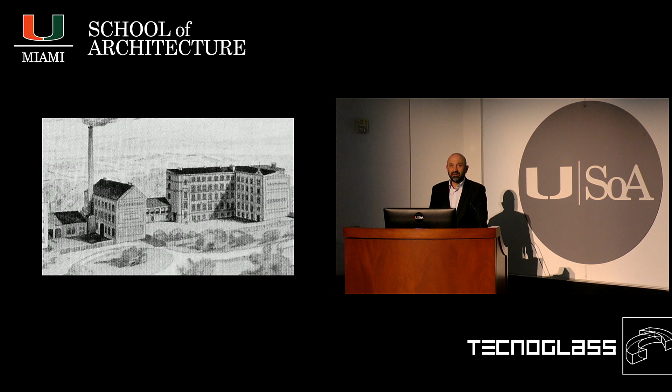And it's a company based in Berlin, or was based in Berlin, went bankrupt in '86, who was at the forefront of font and type development worldwide. The company was called Berthold, and this is their company building. And they produced lead stamps already at the end of the 19th century to create this kind of mesh of numbers and letters to create confusion.

And these patterns are now mostly found on the inside of envelopes, and this is because once you get a letter that has personal information and you hold it against the light, this pattern camouflages the private information. Similarly here on these multiple forms, when you get a printout or your personal PIN number, it's produced by printing through the pattern onto a second layer, but the pattern on the front page camouflages the print inside that envelope.

And my research was not super successful, but the information I found was that around maybe the end of the 19th century, with the advent of carbon paper, and those of you who still know typewriters, you could write the original and copies at the same time by having a carbon paper that traces your writing onto the next page through the pressure of this carbon powder onto the other. I even feel like I have to explain now how carbon paper works.

So it's an efficiency tool in administration. You could write the invoice and the shipping slip and all of this at the same time. And in areas where you don't want the information to show up, it had a pre-printed camouflage pattern. So if you type in the value of the product that's shipped, you wouldn't be able to read it because it's just part of that confusion of numbers and letters.

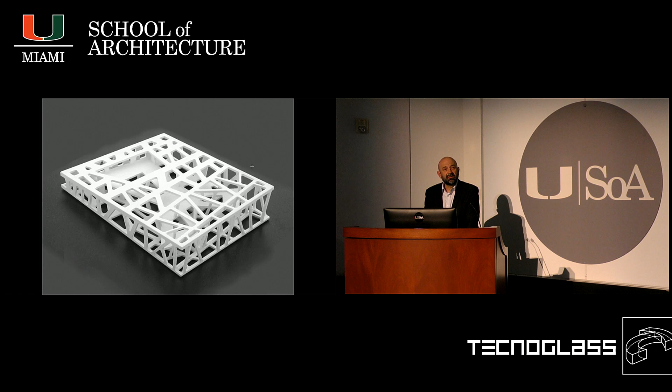On a larger level, this skeletal space that you saw before was already explored in a dining hall near Karlsruhe, in the southern part of Germany. It's a building that used for the first time our timber construction process that we also used in the Metropol Parasol that Rudolf mentioned earlier, that has a polyurethane coating and therefore creates a certain sculptural quality, because we could erase a lot of details that are usually expected when you do a building. There's no metal flashing, there's no other material.

Once the rain hits it, the vertical, the floor, the ceiling, they all are, again, like kind of an envelope, in this case more of a skeletal envelope that looks the same, but of course every surface has a different property. So the polyurethane on the wall might be a different one than on the floor, because the pressure, the diffusion, even the acoustic qualities have to be different.

But in a way, it shows quite well what we try to achieve, which is a sculptural space that shifts back and forth; it's difficult to grasp the scale of it because a lot of architectural elements like stairs or doors are more part of an overall sculptural gesture rather than a tectonic argument. So these are some images here. You see again the green on the floor, on the walls, on the ceiling. They all have different properties, but in a way it's the same skin or envelope of color that creates that space.

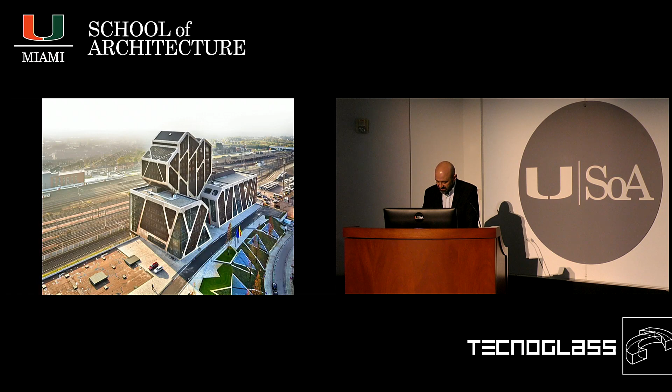A lot of projects happen, of course, on conversion areas here as well as in Europe. One famous one is Hudson Yards in New York. This one here is along the train tracks in the former cargo area in Hasselt, Belgium. You see the train station here. It has a master plan by West8 for the whole ring of the beautiful medieval downtown of Hasselt. And this here is the former cargo area of Hasselt.

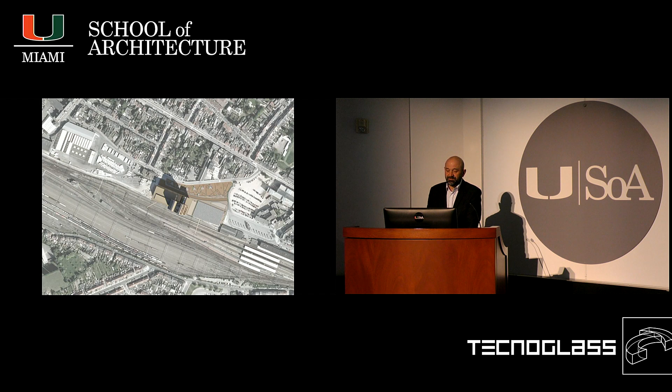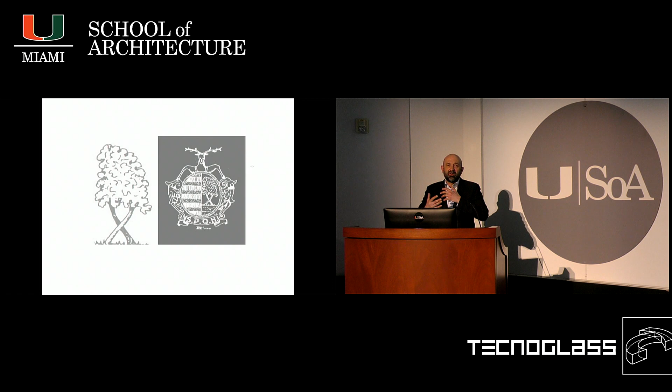Hasselt comes from hazelnut trees, which is kind of a beautiful icon and name for a city. But also the logo already shows that Hasselt means 2 hazelnut trees, and that's the beginning of a community. You have these 2 trees that already embrace each other. They kind of dance around each other. They start to communicate. And that was a beautiful, let's say, starting point to look at the city again.

And what we found was that from each important period of the city, there were always 2 high points in the skyline. So the 2 medieval church towers and the 2 towers from the 60s, which was a technical town hall. And then West8 also proposed 2 towers on the new development. I'm not sure if they knew about this kind of 2 condition in the city, but it happens that they're also always in the same direction, placed in like north-south direction on the city fabric.

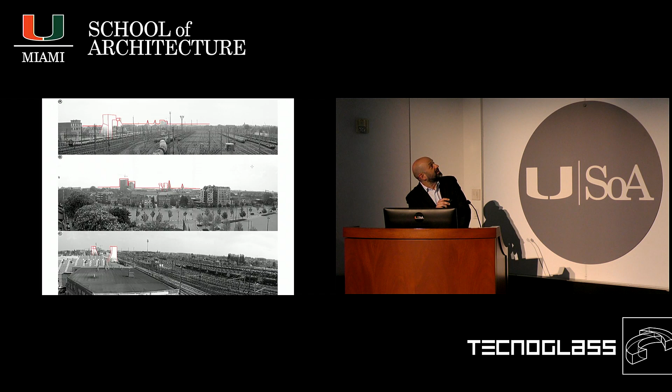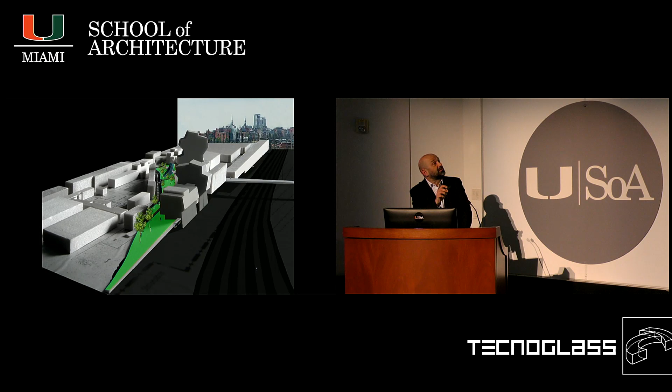So one of them is actually our building, and the other one is the second tower to be built at some point by somebody else. There were 2 teams who won the competition. Our team was A2O Architects and Lens°Ass from Hasselt, and the other team was from Holland, Zwarts & Jansma, that won that other part. So the Courthouse has a couple of references, of course.

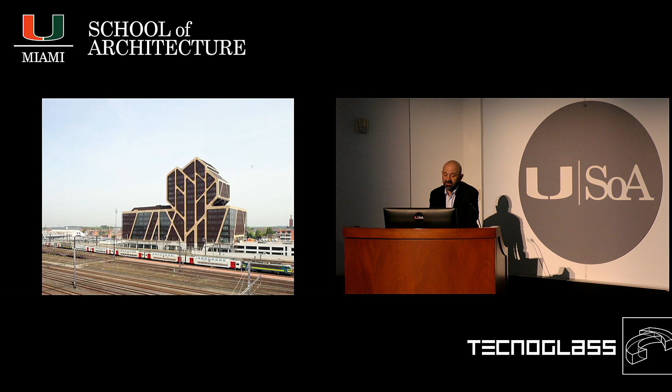And you see some images how the facade kind of plays with that pattern, that structure in different angles, even like little overhangs and glass and shading devices where it's necessary. We have this perforated skin that creates a depth to the facade. Partly is because of security issues and partly because of, of course, sun protection. The interior was done by Lens°Ass, so you even see that this tree metaphor also anchors inside where the reception desk is and into the furniture.

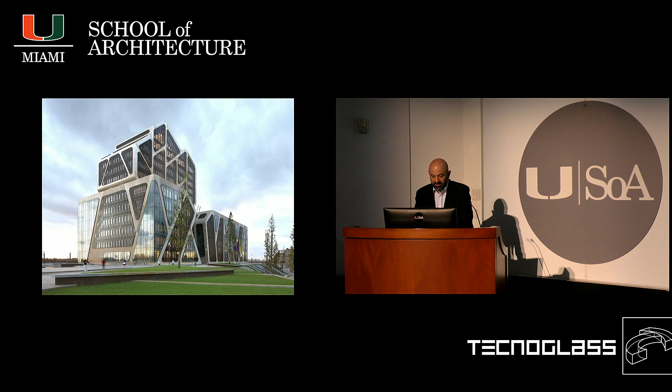Another conversion area, this is Dusseldorf, and not so far away from Hasselt, is this private university called FOM. It's basically an after-work school from 5 to 9. And during the day, they rent out the spaces to the university, which is very close, while if they need more space, they can rent spaces in the university in the evenings. It's a very successful model, kind of a secondary education program.

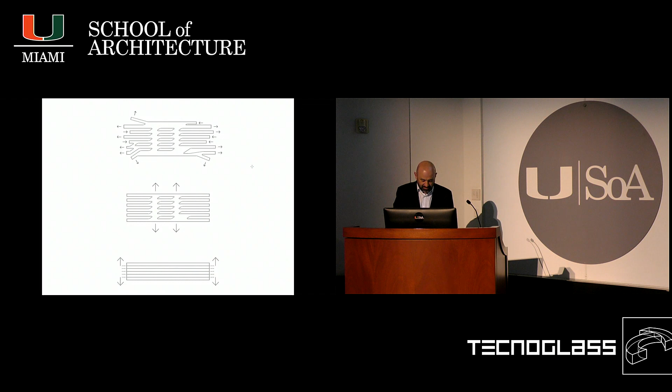So in a way, if you look at the system of extensions of this building, we have the normal floor areas, and then we expand them where we need higher floors, so it's kind of stretched to the top, and then we have these extensions to the side in order to create resting areas or stairs, and we can, in the floor plans, reduce the elements of the stairs that we might need, because we have meeting rooms and halls, so of course you need a lot of circulation and width of stairs.

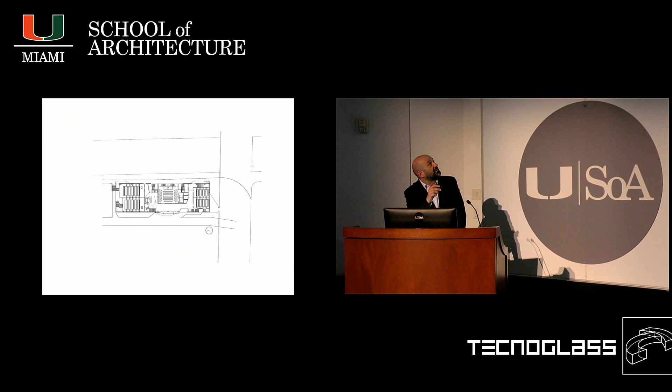So by reducing them, we needed to actually push these areas outside, and that's how the shape or the facade of the building developed. On the lower level, you see the entrance and the larger halls, and then they continue to become smaller floors and smaller rooms all the way up to the top.

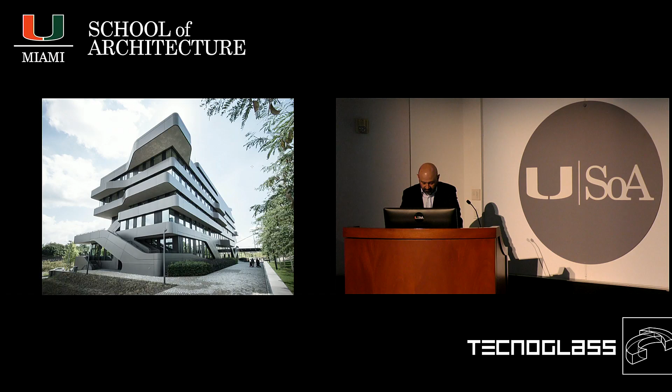I'm showing a couple of projects just to give you the range of work that we are involved with. This is the same, and then we continue more specifically with projects again. This one here is for the same university, a building that we are soon starting to construct in Berlin. That's also a very innovative material that we're using. It's ultralight concrete. So it's a concrete wall that's 2 feet deep. It doesn't have any insulation, no styrofoam or anything. It's fossil fuel-free, basically.

And it has pebbles of glass foam or adobe foam inside the concrete, and they create the insulation that we need. Of course, we have different regulations than you might have here in Miami. Mostly the problem is cold, but now slowly also we are facing heat as an exterior problem. So insulation is a big issue. And the windows are all double windows.

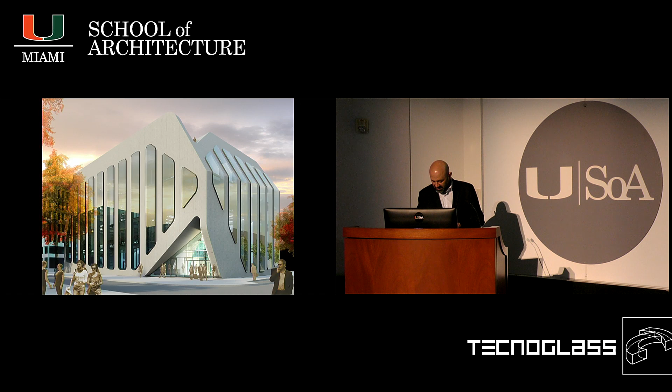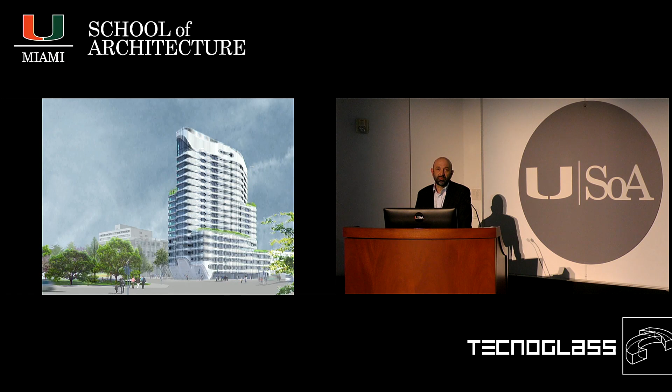This is a high-rise for housing and doctor's offices in Dusseldorf. We are now starting with the facade. The concrete work is already done, so we hope to be finished by the end of the year, early next year. This is a timber project on the facade, but then inside is a very kind of efficient concrete grid for a software company in southern Germany.

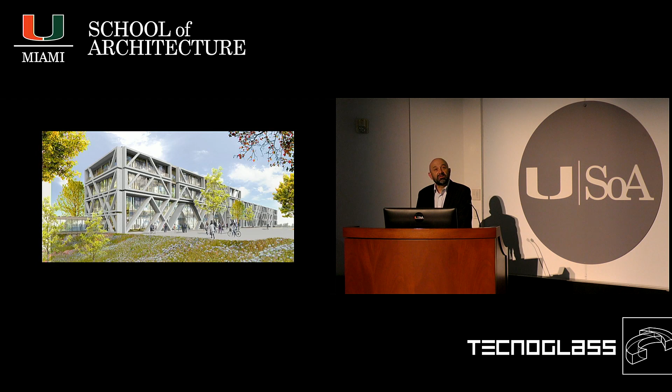This one becomes a virtual reality hub and digital hub for the University of Potsdam, the Babelsberg Film Studios, and SAP software company, an old tram repair station from the 1900s that is kind of overspanned by a large 200-meter-long building to create very efficient contemporary spaces and more of a horizontal village inside here that creates different atmospheres and becomes really a new center for research and education.

This is an office building in Berlin that we started construction just 2 weeks ago, just behind Alexanderplatz. It's only offices. It started as a shopping mall with a hotel and indoor skydiving and a surf wave, and all of that kind of transformed slowly into a different program while we constantly rethought the idea of how these boxes and this kind of architectural gesture might change and have to be redeveloped by completely changing the program.

So instead of designing something that has a specific program, it was kind of retrofitting in the design process over the last 3 years, which was an interesting process as well. Basically similar to this one here, this is a train repair station that now turns into a research, a university building. And the retrofitting, of course, gives you opportunities to rethink, let's say, the program or the rooms that we usually are trained to design for specific programs.

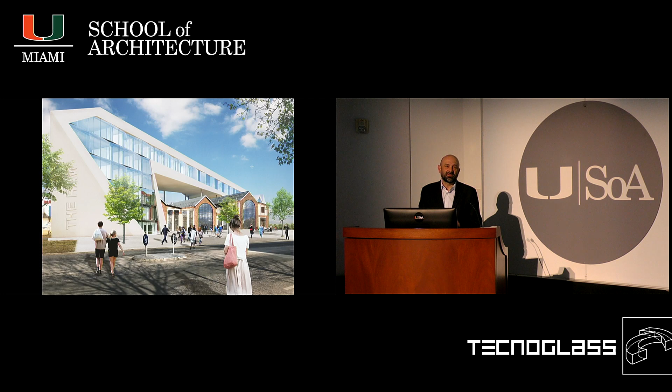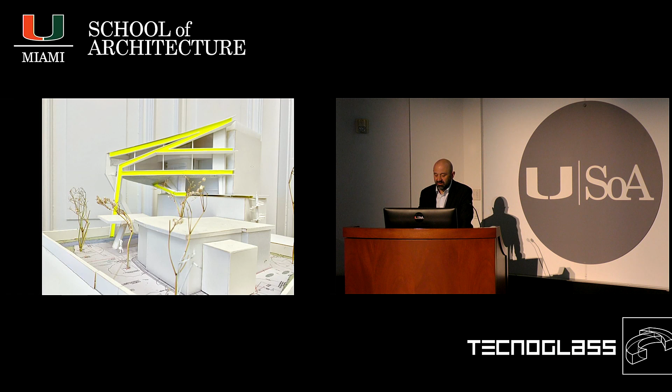This one is an art space in Berlin for the George Grosz collection and George Grosz Museum, which is down here, an old gas station from the 50s, and the owner moves up here to allow a public program or a public museum to enter on the ground floor. This one is a tram station in Freiburg, almost finished. It opens in about 2 weeks.

This is a tram station we just finished 3 months ago in Kehl, which is somehow called the Tijuana of Germany or of Europe, because we have Strasbourg on one side of the River Rhine and Kehl on the other side. And there's a lot of going back and forth because the food is cheaper in Germany, but maybe the clothes, the fashion is more interesting in France. Hotels are cheaper in Germany. The European Parliament is in Strasbourg in France. So there was an interesting article to explain maybe similar relationships that we have. It was called the Tijuana of Europe.

Now, let me jump to Georgia, which is maybe the largest project that we did, but it's mostly just acupunctural interventions in a country that was going through a transformation from something at the edge of Europe, now really becoming a booming country, a center of attention for tourism. Wine culture is back on everybody's attention who loves wine. And for club culture, supposedly they have now the best club in the world, better than even Berghain in Berlin. It's called Bassiani. You can find it everywhere online.

It's amazing. But we were contacted about 10 years ago by the former president of Georgia, Mikheil Saakashvili, and he was very impatient. He really wanted to push the country to something that is running, that is part of a production, part of a tourism culture, part of a cultural production. And we were one of maybe 5-6 architects, as I found out later, who were helping the country to create attention for the value and the fantastic heritage that the country has to offer.

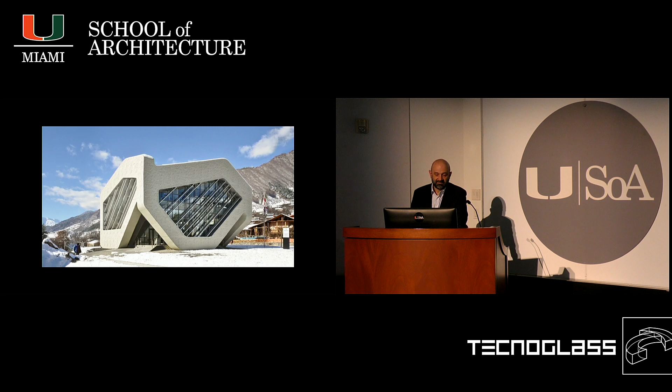So it has basically 3 accesses. One is the tower, one is the check-in before security, and one is the finger after security, and that's it. And that's what you see here as an airport. There's a seating area, and again, the airport with Mestia towers in the background. In the same town, we also built a town hall and a kind of a wedding chapel. That's how they light it up at night. We built a police station,

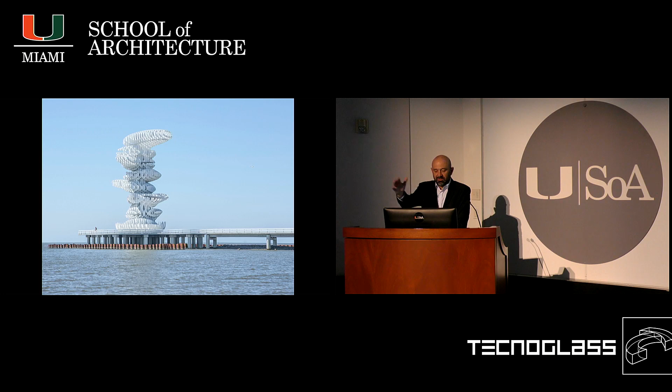and down on the Black Sea coast, we built kind of a sculpture that was meant to be, let's say, the beginning of the construction of a whole new metropolis for 500,000 people. I think this was the last vision that Saakashvili started to build before he had to leave the country. But this one really was a pier with the sculpture where you can walk out, look back at the city, or look into the west towards the sunset. It's now sitting there quite lonely. Nothing really happened after that first construction. Some people sit there to fish.

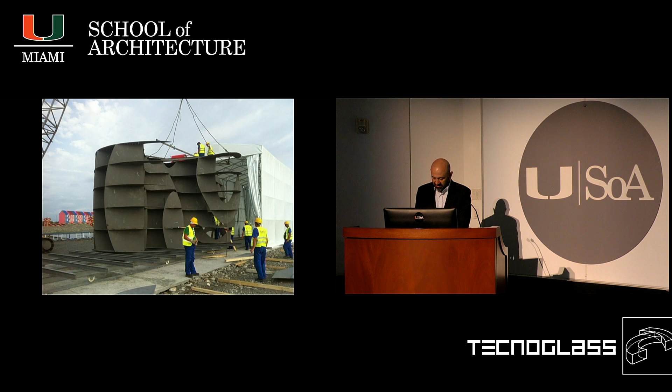It was produced in Turkey in segments and then brought by ship to the beach, put together, and now it's quite lonely sitting there. Maybe one of the most lonely public spaces that I know, but it's really beautiful and kind of shows you, let's say, the dream that the country had about really pushing towards kind of a successful future.

And I think after Saakashvili left, it had a little bit of a dip, but now there's a lot of energy coming back, and it's a fantastic country. Again, I'm not a tourist manager, but I can really recommend traveling to Georgia at this moment of time. It's exciting to see the transformation.

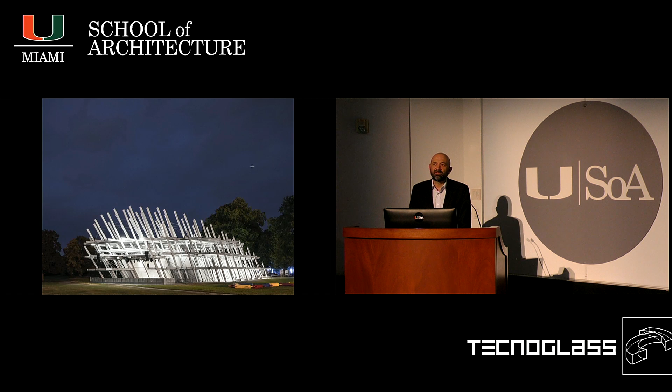So, back to Germany, again, a public building that uses architecture to look at the relationship to history, but also create a certain iconic image that is anchored in a specific condition that you find on site, and then translate into a 3-dimensional argument in order to celebrate a certain moment. In this case, it was the 300th of Karlsruhe, and this was about 3 years ago.

Karlsruhe is famous because it was one of these cities who were built on a very, let's say, strict, very geometric master plan. This is the castle, and then it had these radial streets running out, they all focus on the tower of the castle, and then even the park and the forest behind had all these radial alleys, and that helped, when you went for hunting and these animals were pushed through the forest, you would always see them where they were running because they had to cross at some point one of these alleys.

But also Karlsruhe was a very important city in Germany because it had a very liberal agenda: different cultures, different religions, different nations, minorities who had to run away from other countries, all were able to settle here. And this is also still why the German highest court sits in Karlsruhe, just next to the castle here. So it has this tradition of being a very democratic, very just place in Germany. So, of course, something to be celebrated.

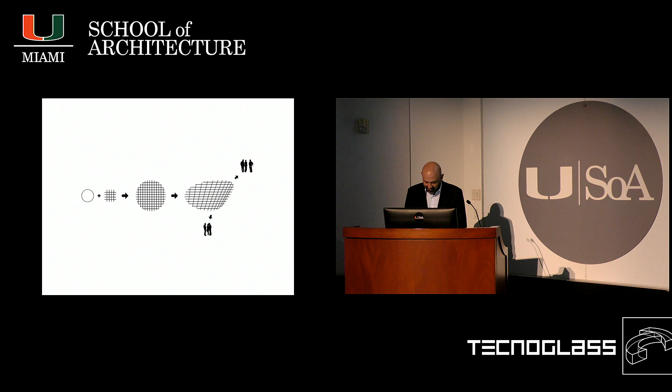And our proposal was this project here. We wanted to create a grid that was not monofocal, like the city fabric that only looks at the tower of the castle, which was all bombed in the Second World War and rebuilt. But we wanted to create a grid that had multiple focus points, more of a democratic grid rather than this very monarchic grid of the building before.

And then the building somehow had to lean, if you take this as a sphere from a grid structure, had to lean on the side in order to allow a very important visual access from a lake that's down here to the main tower of the castle to be seen. It's all in timber because it was a temporary building only for a couple of months, and it had to be rearranged, recomposed, maybe built up on a different site or reused, and now some of the timber elements are used as seating benches in the city in different places.

So on the outside, it created a stage. On the inside, there was a meeting room. You could even walk up. They had about 450 different concerts and programs in 300 days, so it was very intense. But also that park, it was kind of easy for us because that park sits in between two universities and is always busy. People always hang out there. Karlsruhe is in the Rhine Valley. It's a very nice and comforting climate, very sunny, maybe one of the best climates we have in Germany.

And for the opening ceremony, when we didn't know they were planning this, these rays of timber and light even extended all the way into the sky. So that grid of the city, that grid of our building, and these rays of light extended our project into the overall, let's say, cosmic reality. And even the fireworks continued with that theme in a larger dimension.

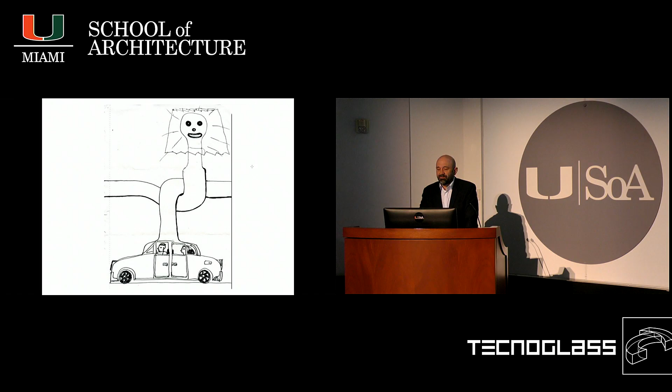Another building that plays with a very specific imagery or, let's say, placemaking is the garage in the Design District. We were invited a couple of years ago by Terry Riley, who was curating that facade of the parking garage, and it was a very interesting concept that we worked with. So it's WORKac here from New York. It's us from Berlin. Then it's Nicolas Buffe, who is French but lives in Tokyo. There's Clavel Arquitectos from Murcia, and then K/R at the other end of the building. The concept that Terry introduced to us is based on the exquisite corpse.

So one starts to draw the head, and then it's folded. You only see the last two moments of that line, and then you continue with the body, and somebody else draws the feet. So it's a kind of a collage of a facade, and that's also what the name of the building originally was. It was called the Collage Garage, and I still think it should be called that way.

But later on, when two museums moved to that area, they renamed it Museum Garage to make it clearer as a destination for everybody to understand where they have to go to. But I think Collage Garage still works very well as a name, but also as the concept.

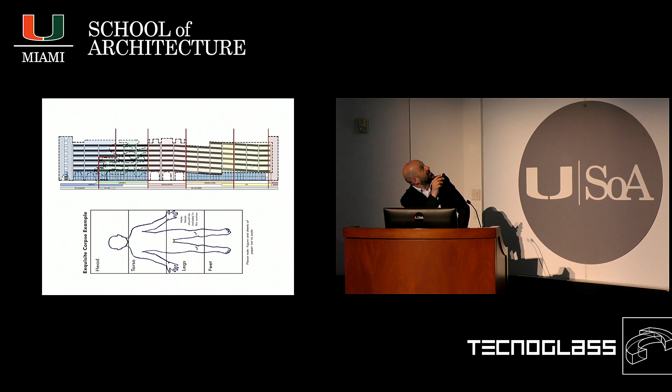And you see here the development, the unfolding of the facade, where here it's the turning, it's the curve, but you see how each are placed one after the other to create, let's say, a scale that works more on a pedestrian level rather than on the more industrial reality that happened there before.

So I don't know how much you know about the Design District. I'm just maybe condensing it very little, and it might be not correct because it's secondary information that I have here. But Dacra and Craig Robins bought a couple of blocks there, which was just warehouses basically, and developed it in 10, 12 years into now a destination for fashion, food, nightlife, art, culture, museums, the De La Cruz collection, and the ICA moved there.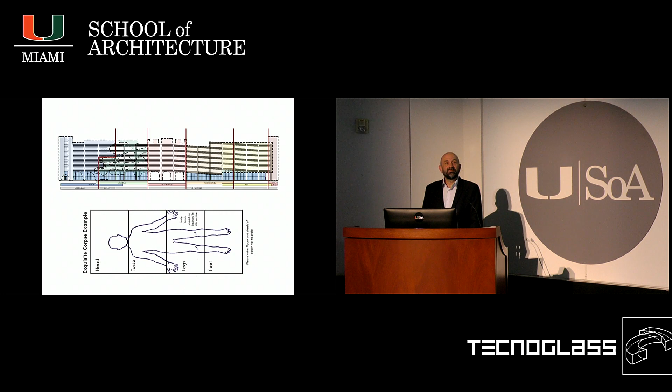It turned from, let's say, a kind of a leftover part of the city into a very dense pedestrian feel. You have courtyards, the buildings are much smaller, the facades really create a certain, let's say, rhythm and attention span for pedestrians rather than for cars. And that's quite interesting to see how that worked. It's an experiment, and I think it works on many, many levels. And Museum Garage is one of those last projects on that development, when, of course, people who drive there also need a place to put their car.

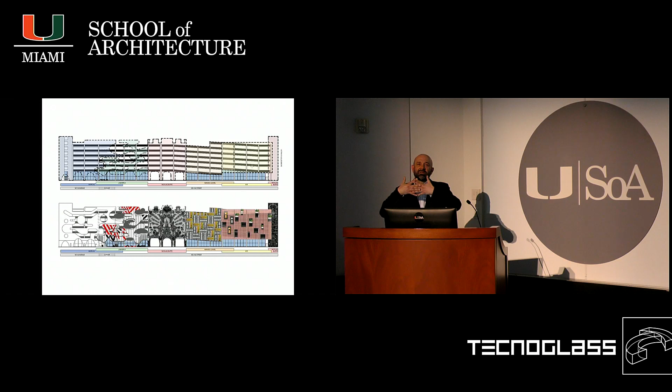So you see the development on the lower level, and usually we only had 3 elements, let's say 3 axes to place our facades, and we didn't really know where we were placed. We designed each part, then it got reshuffled, we had to reconnect. So it was a back and forth process that was quite unique and I think innovative in how collaboration can work. And only in our intersection with WORKac, it was more like holding hands, reaching out to the other one, like 2 hands where the fingers interlock on the facade.

After we designed our facade, which looked at the shape of car lights and other, let's say, organic shapes that we found on cars, once it was placed, we tried to reanalyze what it does to the overall facade development. And so we decided basically to connect this to the WORKac facade and to the last one to kind of hold both ends together on our project.

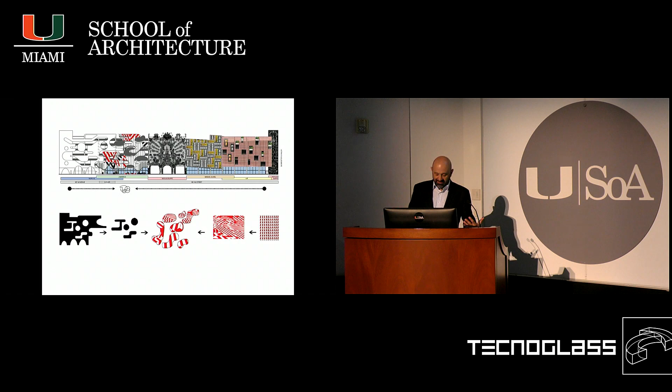So there's an inversion of the holes and closed areas of WORKac to, let's say, now the floating elements. And there is a placement of these security stripes that you have on K/R's facade onto our project. And so by taking 2 elements and fusing them in ours, we wanted to create a mediation between the 2. And the project is called Hugs and Kisses. In a way, it talks about embracing and loving each other.

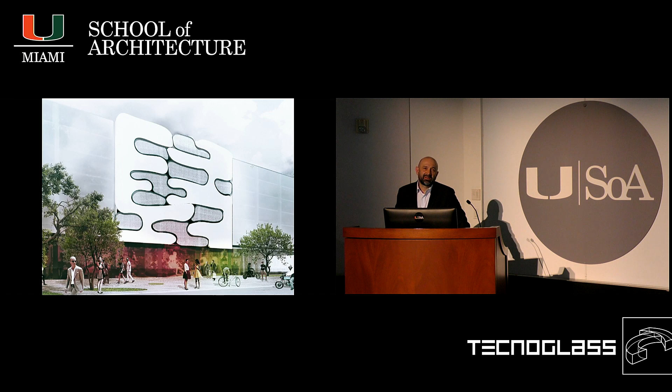You have studies in the beginning that were these opening elements. There are 40 to 60% of air ventilation that we had to allow. And then this one was placed next to the neighbors, and we started to create these overlaps or these references to other facades. And I'm showing a couple of images now during the construction process.

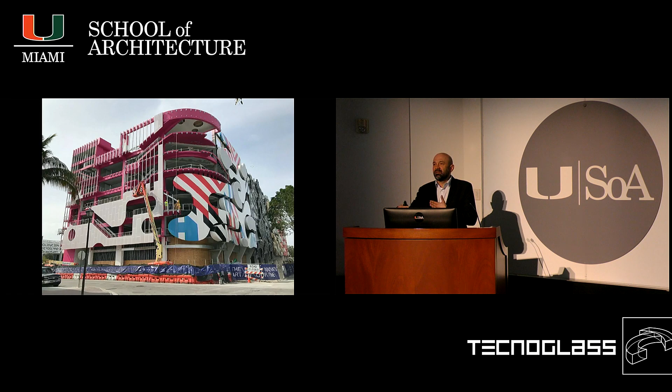It's a very simple, generic concrete grid behind that facade, and we only had about 3 feet here. WORKac had a little more because there was a different distance between the structural grid and the facade. So they were able to introduce some program like stairs and a library and a playground and a little ramp. But here we only had basically light, air and a little bit of a relief that we could introduce to our facade.

And this is now what you see when you get there at night. There's also a panel here that is changing, maybe rotating every 2 years with a different artist's artwork that's placed here.

And I'm just moving you around the building a little bit. So this is our project here with perforated elements that glow at night. You see this, kind of trying to work your way around the corner. You see the work of the curve that happens there. And then there are these cuts to the other projects.

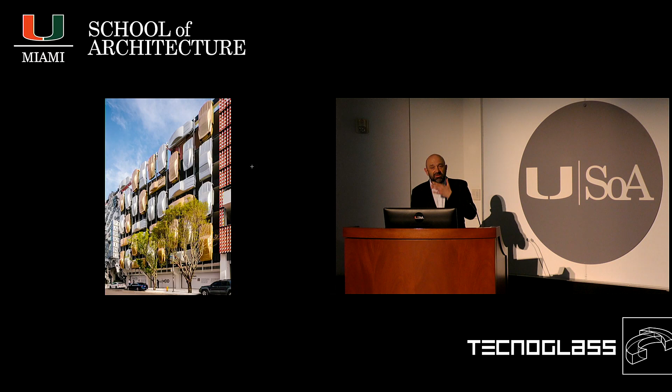This is Nicolas Buffe. He fuses kind of Baroque drawing with manga, Japanese manga. You have elephants who transport obelisks and other elements, maybe Ghost Ride references. So it has a lot to do with mobility and transportation. Then you have Clavel Architects, who took car bodies, and they had to be redone because of fire issues and construction issues. And the headlights glow at night, and then the Keenen/Riley security barriers.

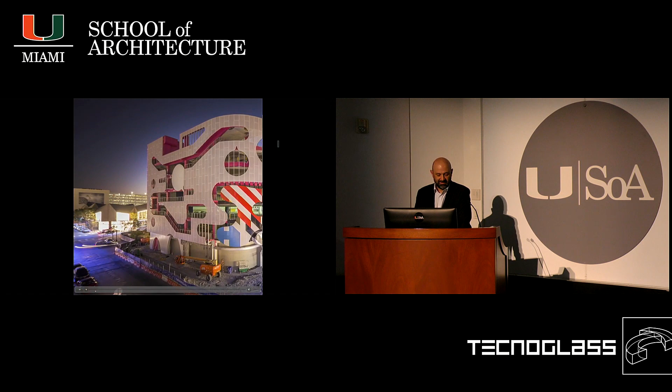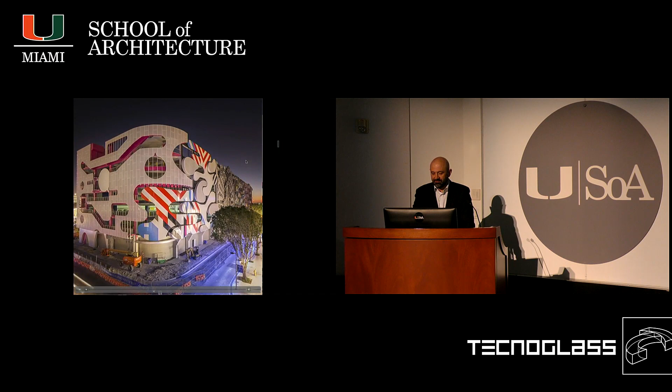I think it looked better without the trees in front of our facade. Now you hardly see the facade anymore.

Okay. And how do I jump back? How do I go back to this slideshow? Further down here. Further up. Further up. Here. This is the next one. Okay.

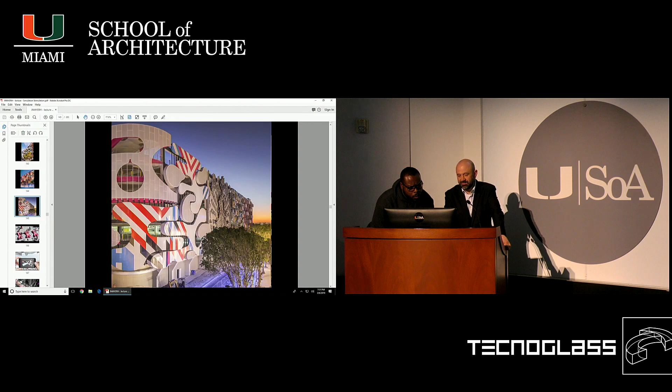Okay, another public project that deals with the history of a specific site and its kind of unique geometry is XXX, Times Square with Love, that we installed about 2 years ago. It was commissioned by the Times Square Arts Alliance, who are running the program on Times Square, which is silent operas, sports events, theater, public interventions, the Valentine's Heart, and so forth.

We proposed XXX, Times Square with Love, as a project where it allows you to look at Times Square from a different angle. One is laying down, looking up, which is the most simple one, but also a way to look at it via your social media and digital devices, and you communicate being in that space also beyond the pure limits of the square. So we wanted to deal with all the webcams that you have already on Times Square as something that looks down on you while you're looking down and looking up.

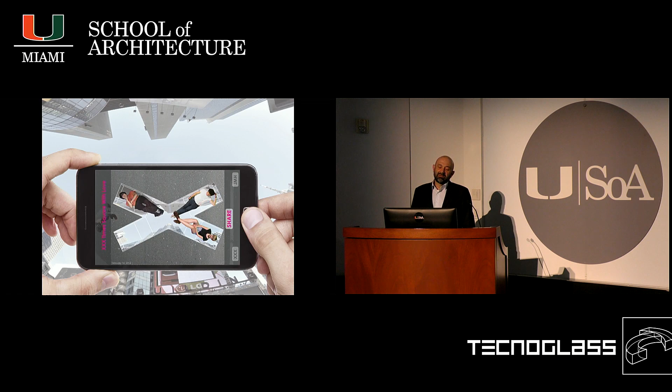So this relationship between what is already there embedded as media, and which other space in the world has that much media presence than Times Square, and to make you kind of conscious but also playful with that reality. So Times Square is an X that comes from 7th Avenue and Broadway. That's one starting point. And it's placed next to the police pavilion, so no safer place than here where you can sleep and have a nap during the day. There's always 2-3 guys with machine guns around you to protect you.

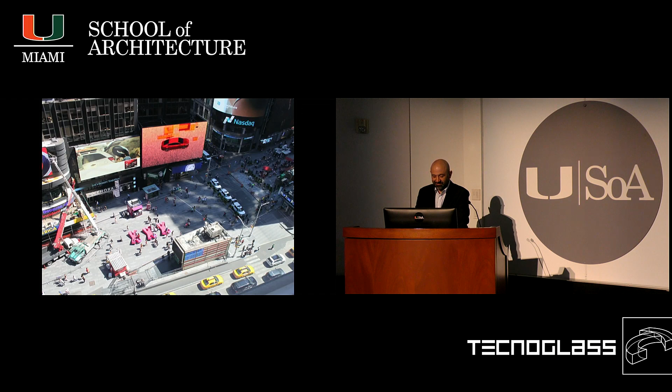But also it refers to a history of Times Square which was a little more seedy, and Times Square Arts Alliance really responded very quickly to that, saying, well, finally, we can refer to this, because we often get criticized that it became so sanitized and such a commercial space. It's just shopping anymore. Like, we completely forgot about the history of Times Square and 42nd Street. And I remember when I was just starting to study in '92 in Princeton, and we went to New York, they had just closed all these movie theaters.

All these art projects like Barbara Kruger or Diller Scofidio did their art interventions on the awnings, on the facades, these videos on the doors. So in a way, I had this in mind, or I remembered this was a really strange and important change that happened in that part of the city. So XXX, Best Porn in Town, is basically also a reference to that part of New York, which was once a very lively part of New York.

But also it asks for a certain interaction that people have with each other just by the geometry that's introduced. So it offers space for at least 4 people, even more. You have to negotiate who can stretch their legs, who has to move around a little bit. You might sit down next to each other. Of course, social media and your iPhone are very important to communicate you were there. You can prove that you were there. And it allows you to sit down and rest.

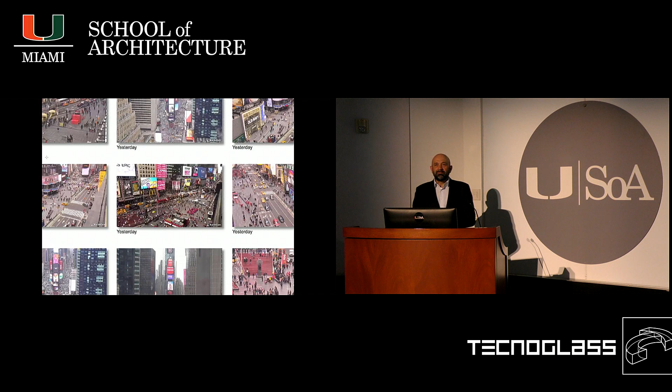We wanted to actually work with this dialogue where the webcams record you. You could log onto that webcam and actually see yourself lying there and sending it out to your friends, or looking at the webcam means looking down on you and so forth. We couldn't really realize that media part of it, but the consciousness was there, and this was the concept that we had, that you're traced.

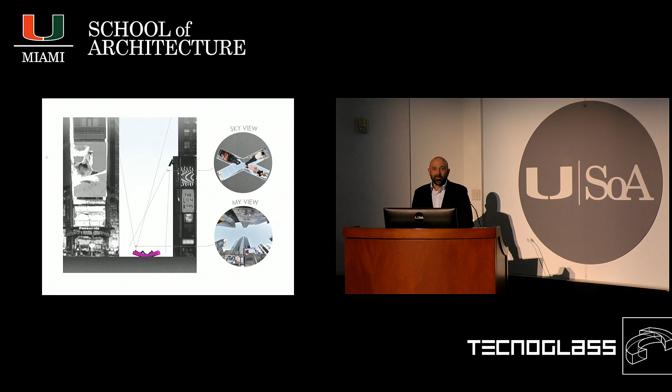You look up, they look down on you, and the whole world basically could look down on you at that time. Of course, we want to share this, and this is what we all do now. We prove, we take selfies. We created a Snapchat filter with the Times Square Arts Alliance, which looked similar to this one here. And people used it. There were even signs how to log on and how to communicate that. These were some mock-ups that we did. We all know these realities by now.

After the opening, and I think 3 seconds after the ropes were taken away, since then, I think there's 24 hours somebody sitting on them. And at night, it's more busy than during the day. But even the evening after it opened, I took a cab home to Brooklyn. It was on the cab video. And if Times Square doesn't have that media presence, who else would have it? So this was fun to look at.

2 weeks later, on the real estate page, it was all about that area in Manhattan. And the image to kind of tell you there is a change happening was the triple X on Times Square. Very minor, tiny intervention, creating such a different perception of that space. And I thought that was an interesting point, how scale really scales in a completely different way. And then a little bit later, a year later, it also was part of the 10 places that define New York City reimagined.

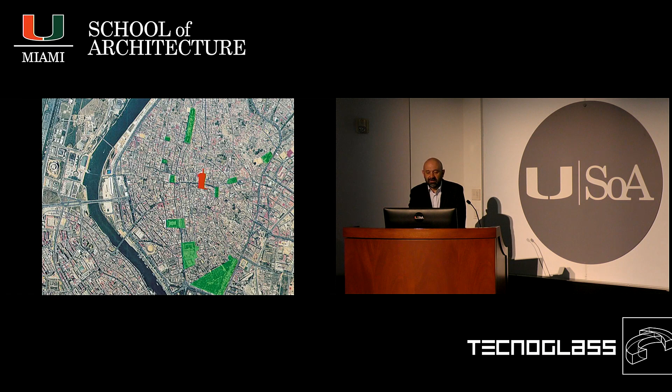And this is when I was in Seville for the first time. And I remembered it was really hot. It was very unbearable to be outside. And when the competition asked for introducing a new urban space for the 21st century, the first thing I imagined was shade and shadow, because that's the first thing that you need to actually hang out outside. What you also see is that it's a very dense fabric. It's basically like Venice without the water, and you have very rare but very important open areas, little pockets of parks or plazas.

This one here was never really a plaza. It was a cloister, then the cloister became bigger, they ripped out more fabric, then it became a market, a food market. I showed you a picture of that earlier. So we thought to reimagine this space and to keep in the tradition, it was always a building, an institution, and not so much an open public space.

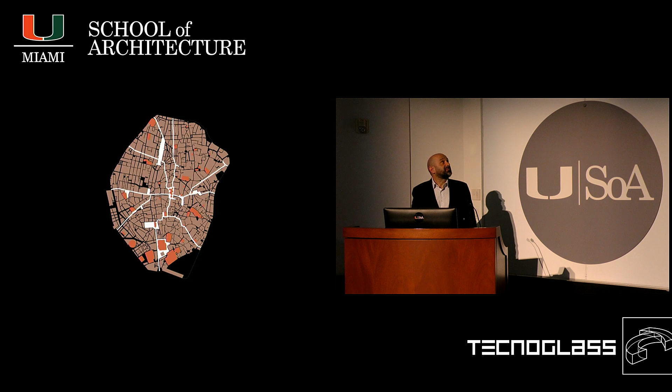This is Metropol Parasol, the largest timber structure in the world, as our engineers and a timber construction company told us. It has a couple of different layers, but one important one is to go up there and overlook the city. It sits in the very heart of this medieval downtown, and it has also the main historic axis running through it. When the excavation started to build an underground parking garage, maybe 20 years ago, a little longer than that, they found all these old fish markets, mosaics, ruins of the building of the city, basically the founding of the Roman city of Sevilla.

And this is what we found at the beginning of the competition, this was the reality where when the city started to construct this parking garage, take out the ground, they realized it's a window to the history of the city that you cannot just erase by a parking garage. So it sat there for a couple of years, maybe 10 years or so, until the idea for this competition started. And it was an open competition that we entered as, I think, many other architects.

2 stages. The first one was completely anonymous, then they selected completely different 10 proposals. One was a big jungle, one was a project like Centre Pompidou, one was a minimalist plaza with 3 high-rises, one was our project, one was kind of a fun palace project in the middle of the city, one was more, let's say, historic buildings, reconstructions of the old city, and so forth.

And then all these 10 projects had to come to Seville, talk to each other, present to each other, present to the public. And then there was everything available online, each drawing, each text. There was a guest book at that point. Now you would call it a blog. People would write on it. They would exchange ideas. And our project was the one that was the most enthusiastically discussed. And that gave us a real strong push. We worked hard, and then we won the competition in 2004.

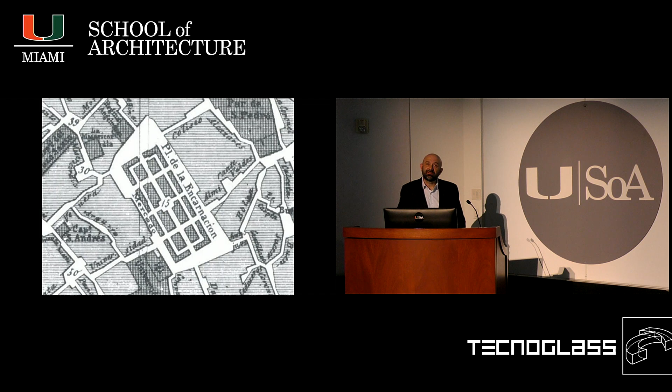This was the market on that site, which was demolished in the 1970s. It was really run down. I think today everybody would try to save it, but in the 70s it was more important to create a temporary car park in the center of the city.

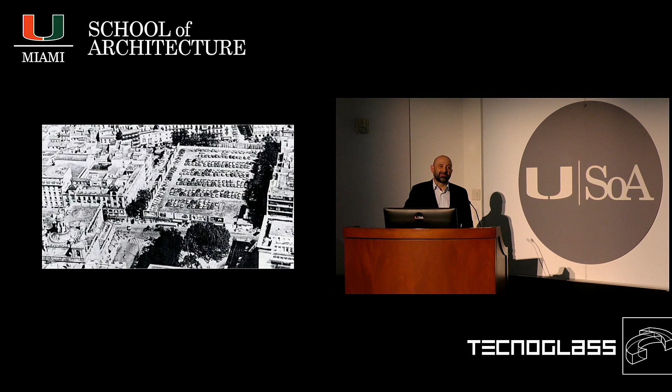Then when the competition started, we did a couple of tests, like what would this roof look like that then embeds everything else underneath, like the food market, the archaeological museum, the window into the history of the city. And these studies then turned into the proposal that we sent in as more of a cloud structure, more conceptual cloud in the first phase, and then we actually had to ground it in the second phase that came until June 2004.

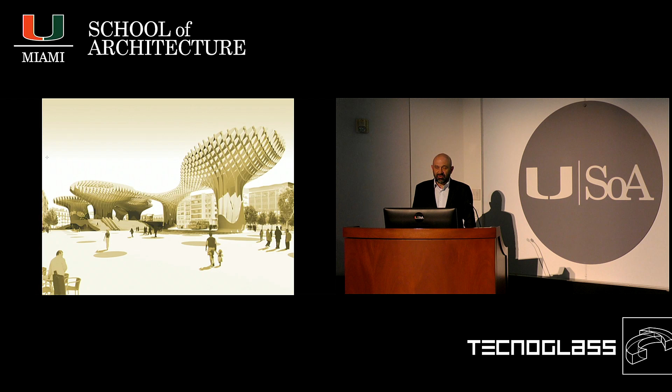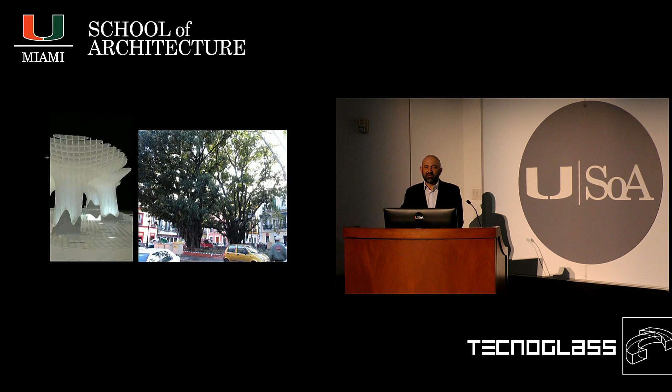There were a couple of references that helped us to argue this project as something that is really specific for that place and not just a drop sculpture that could land anywhere. One was these huge trees on the neighboring plaza, this beautiful undulated stone roof, the cathedral, again, a floating kind of carpet above the city, and of course, the structure of the cathedral inside that becomes the space-defining element.

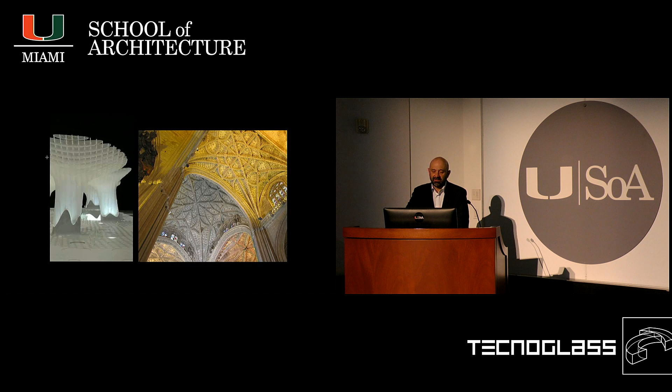This is the layering of the program. You have the archaeological site, all the mosaics and Roman ruins. Then this is the food market that we had to bring back. An elevated plaza as a roof to the food market now for specific events. And then the roof with another cafe and a big room to rent, like for festivities, and the skywalk to overlook the city.

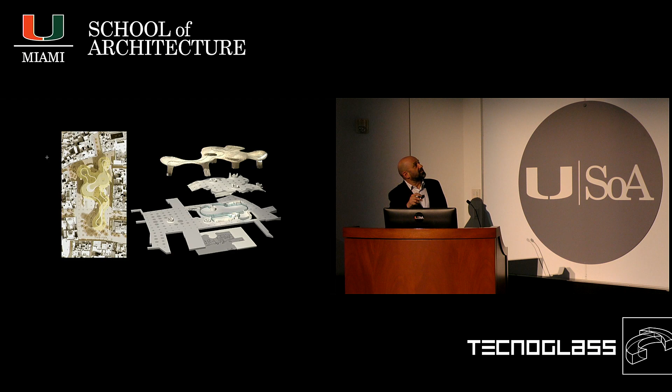The design worked the other way around. We started with the roof. Then we had to place the loads on very specific points where we were allowed to actually go into the archaeology that was pre-researched by the archaeologists before. So we had to kind of collect these forces on very specific points. And then the other program kind of built up from the bottom.

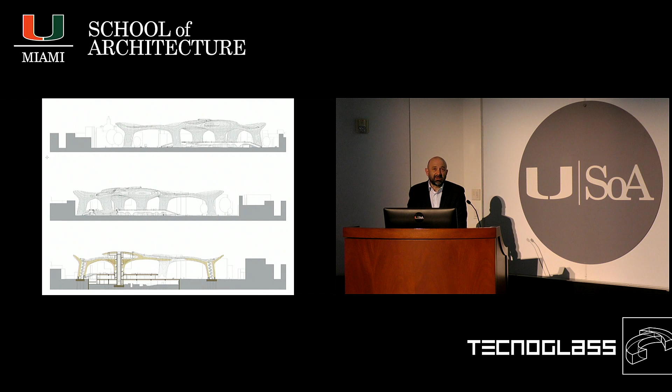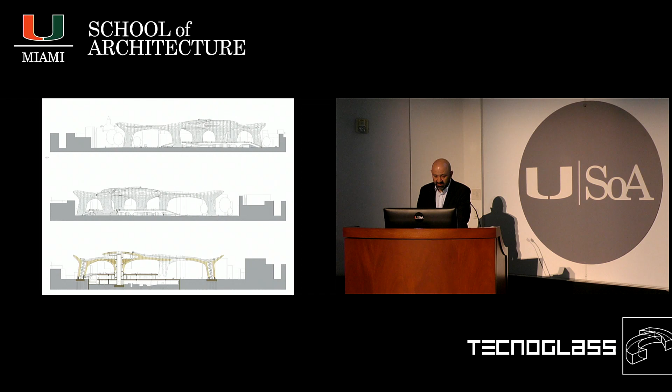Everything you see in light beige is timber construction. The rest in brown or in gray is either steel or concrete. And we had to build some parts in steel because of the spans, mostly across the archaeological sites. And then for the elevator shafts, we needed concrete cores because of earthquake and fire issues, but everything else then became a timber construction.

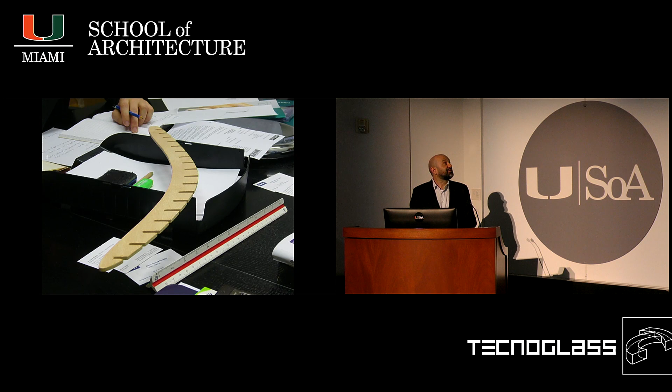And it's not that we wanted it to be timber from the very beginning, but by researching different parameters with the engineers, with the construction companies, and then with another company at the end, we compared steel construction, timber with polyurethane coating, glass fiber reinforced concrete, and it was always the timber with the polyurethane coating that was supposed to be the best solution when you look at prefabrication qualities, construction pollution, earthquake behavior, fire behavior, cost development, logistics, and so forth. And therefore, it became a timber project.

It looks much simpler than it is here, but in the end, just the connecting forces from one element to the other were so complicated, and we couldn't even follow anymore.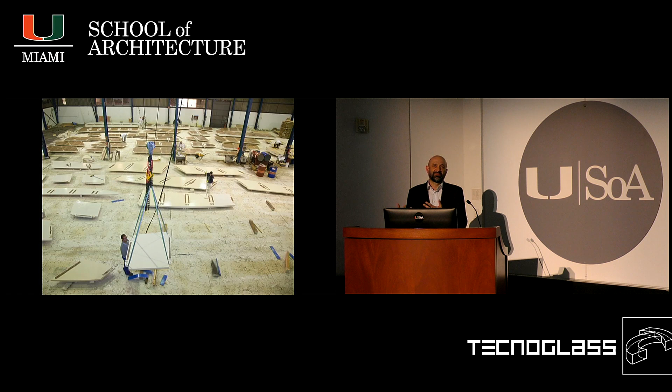Then the timber comes from Finland. It was brought to Germany. It was layered, laminated in Germany, then brought to Seville, coated with polyurethane outside of Seville, then brought on the construction site. About 4,000 different joints here that had to be, of course, very well cataloged.

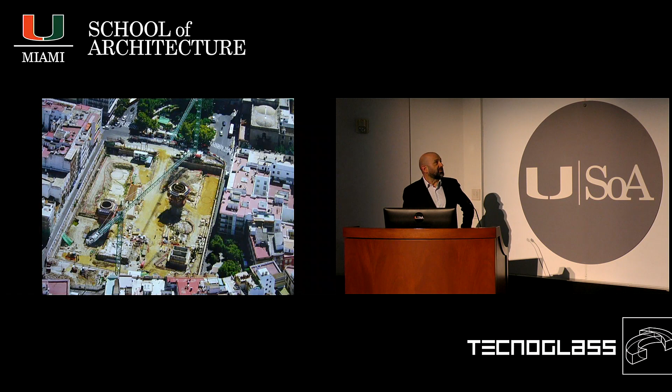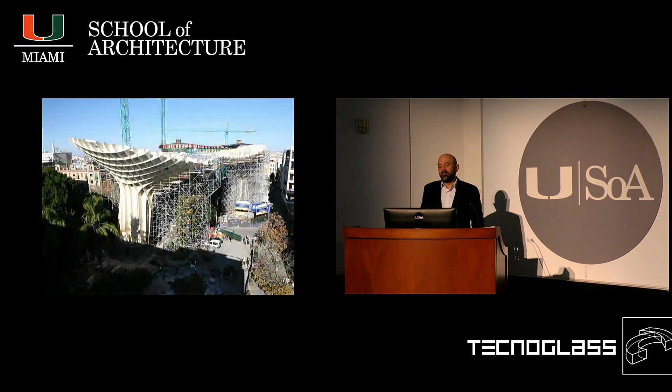You see the two concrete towers here for the elevators. The steel construction that runs above the archaeology. The putting together of the timber, step by step, overlooking the city. And so the roof is created with these open ends.

And in a way, if you look at the design from the first phase, which was a perforated kind of cloud skin, to now building the volume inside that skin and leaving the skin basically immaterial, allowed us to be quite flexible when it came to adjusting to requirements from the landmark department, be lower here, go higher here, from the engineers, less weight here, more span height on this side. So just by going up and down, this kind of inside grid was very helpful to adjust to all these different requirements.

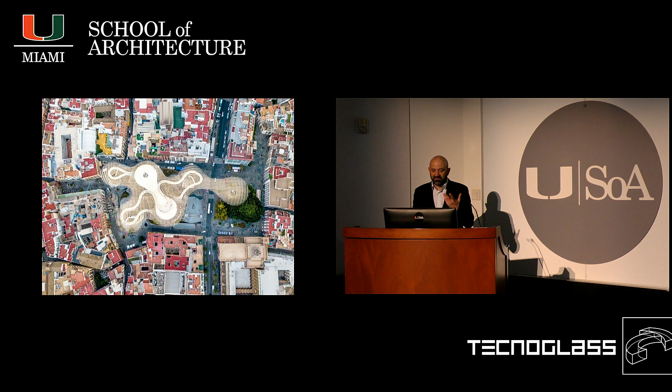And here you see all the connecting parts. There are steel joints with, let's say, metal rods that run 50 centimeters to 1 meter, like 3 feet, into the timber to hold these elements together. From above, you see the grid that's kind of transparent and open. Only in the parts where you have meeting rooms and cafe, it's a roof that's covered.

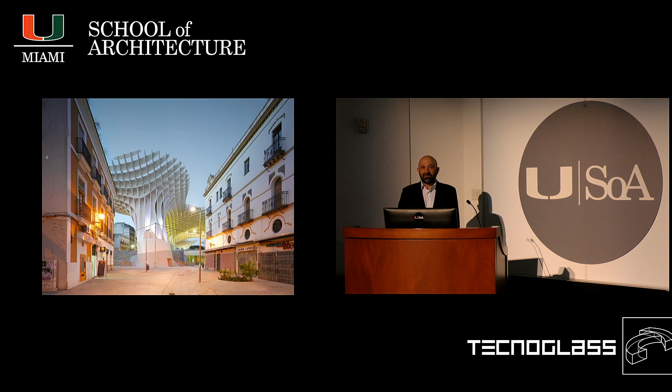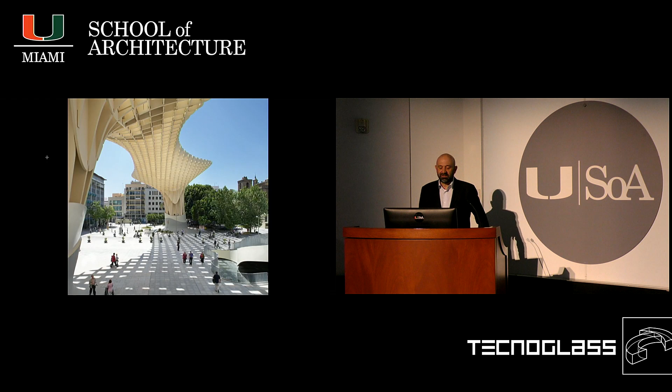And then by finally arriving at the site, you have this dialogue with the historic city fabric around it, the sky that creates the shadow. This was the first idea that we had in mind, the shadow that really defines the space and that changes over the period of a day, even the seasons. And one moment it's like a grid, and then a little later it becomes a swoop. It hits the shadow against one of these columns.

It projects it down onto a seating area of a cafe, or it projects this grid, this orthogonal, very rational grid that then loosens up and becomes organic above it onto the elevated plaza.

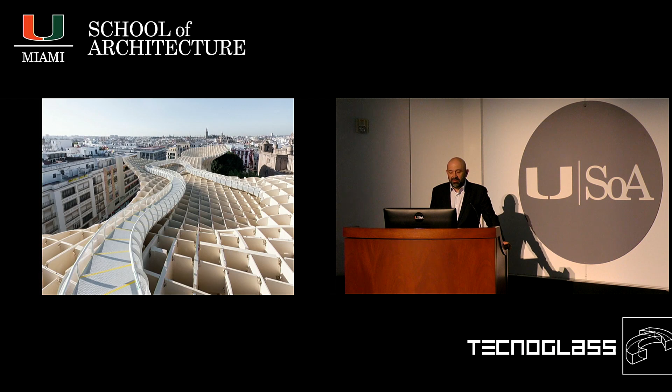Some dialogue again with the neighboring buildings, and when you're all the way up there, you have the walkway overlooking the city at night. It's open till I think 1 o'clock or at least midnight, where citizens are allowed to go up there for free. For tourists, it's $1.50, and you get a drink for it on the top. So it's very, let's say, inviting and friendly to be there.

But now I'm showing you how it really arrived in the city. It becomes part of the city advertisement. People who were involved in the church, in the Semana Santa, which is this religious week before Easter with all the floats, they really hated the project. They were fighting against it. They had demonstrations. They thought it was ruining everything that Seville achieved in the last 500 years.

But the year after it was finished, it was even put on their cover, so it couldn't be so bad even for Semana Santa. And it wasn't so bad for Semana Santa. It also was very good for the Christmas markets. Schools built it as a crib; it became a kind of pedagogical tool.

But this is the Semana Santa where you have all these floats going through the city. These big stairs are very inviting to look at the floats coming by. There are about 20 men underneath these very heavy structures. You can hear the breath. There's a very specific music. They go very slowly through the city, and you see here, this is the float. This is how a week before Easter looks, and especially under Metropol Parasol.

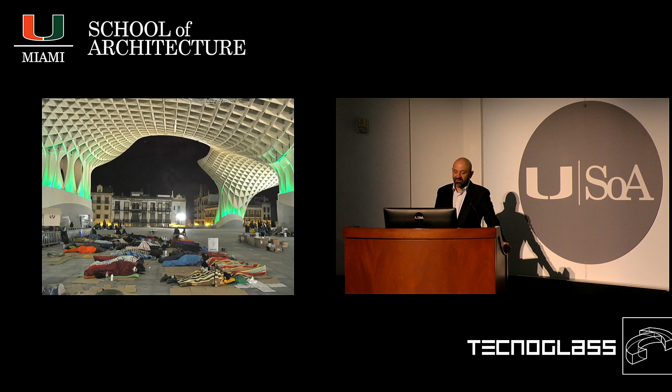Even in this case, let's say the structure of the project with these 6 stems was organizing these demonstrations of this very important political movement. So one stem was the Wi-Fi zone, one stem was the kitchen, one stem was like the sign up for the discussion groups and so forth. So even there was a plan, and I can't find it anymore. I took a picture where it says exactly which stem or which kind of footprint was doing what during that moment. And you were even allowed to sleep there, which is not possible anymore now.

This is kind of a regular day when it's busy and warm and beautiful in Seville, but it works also for different media. For example, for very cheesy Latino pop. I found this online on YouTube. It also works for hip hop. It works for another cheesy Latino pop, that's the elevator shaft or upstairs on the Parasol. It works for Bollywood music, and it works for Swiss chansons. It didn't actually work for Miss Spain, who wanted to become Miss Universe. She took pictures up there. She did not get Miss Universe.

This was last week. Harper's Bazaar shot the new beige soft neutrals, they call it, on Metropol Parasol. So this is the spring color of 2019. New Balance found it inspiring for their soles. This was a couple of years ago for the public viewing of the soccer games.

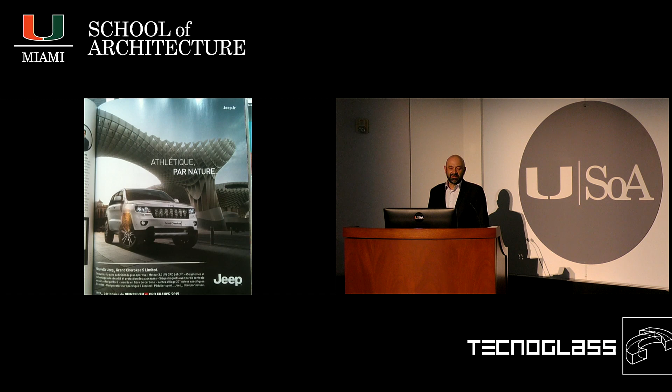Advertising also likes it, especially car companies. This one was rebuilt by Mercedes-Benz. The floors are different, and we don't have these kind of buildings in the back. But BMW was there. Also Jeep was there. Volkswagen actually replaced it onto some like highway with some other background, I don't know. That was expensive for them. This was Renault who was there.

And it also works for selfies and people who want to prove that they were at the right spot on their vacation. It works for social media and for dating apps. Tinder on the left, Grindr on the right. It always makes you look smarter. And it was on the cover of the Lonely Planet Seville, even with the #1 travel destination in 2018. Of course, we know it's never really good and bad. This also causes a lot of problems with Airbnb culture, tourism kind of killing some of the, let's say, neighborhood realities that we enjoy usually. So it's something that is also, of course, critically to be observed.

But Red Bull also likes, of course, the shapes and skaters of the floor becomes a vertical element. This is Gay Pride or the Cartoon Festival on the other side. So that turns into fashion at some point. There's, of course, tourism and souvenirs, little elements that you want to take with you. Calendars that you can buy on the street, photography, street art. And then there are offsprings too. This one I got sent from an Indian friend. This is an Indian sports television show, and they liked it.

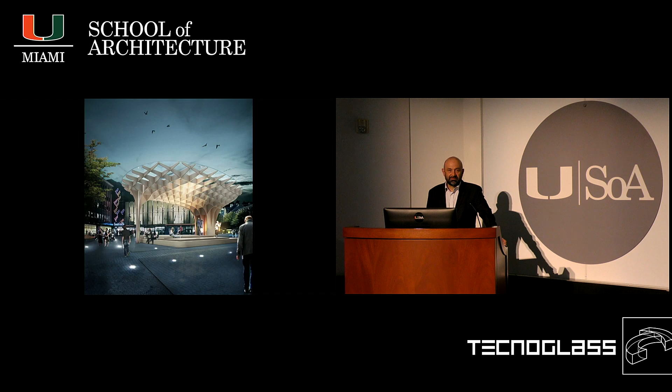And I'm not saying that maybe they come directly. There's something in the air, or it was something in the air at that time, where this kind of gridded intersection of sheets are just out there, and they appear in all kinds of scales here as airport lounges, as interiors of shops, as competition entries for other projects. And I get this sent by friends and colleagues as even furnitures, and in a very minor detail, and I hope now that video is running.

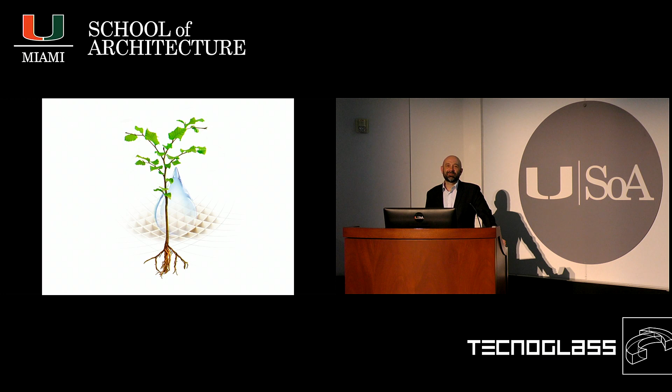And this is a video I brought for Rudy. It's for everybody who loves cats, and I always wanted to end my lectures with a cat video. So I got approached. They did research on what's the best motif for Cat's Best. And the test clientele always came back with Metropol Parasol on the packaging as the most suiting motif. And here's the video.

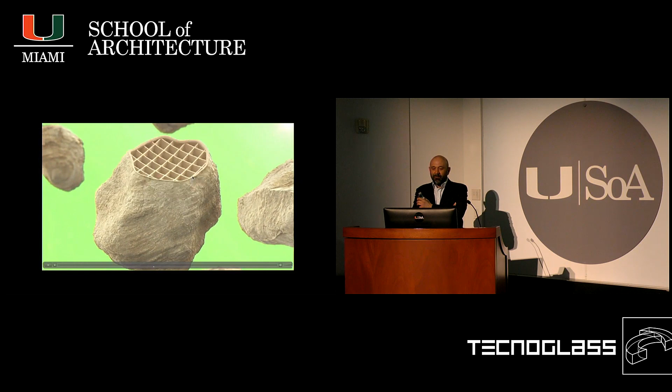Die Natur hat einen schlauen Weg erfunden, Feuchtigkeit aufzunehmen. Nach diesem Prinzip haben wir Cat's Best entwickelt. Die pflanzliche Katzenstreu aus technologisch veredelten Aktivholzfasern, die Feuchtigkeit und Gerüche aufnehmen und einschließen. Und so auf vollkommen natürliche Weise bis zum 7-fachen ihres Volumens binden. Kompakt, ganz leicht zu entfernen und so hygienisch, dass die Streu bis zu 7 Wochen im Katzenklo bleiben kann, bevor der nächste Komplettwechsel fällig ist. Eine rundum saubere Sache. Cat's Best. The power of nature.

Now I can move back to my slideshow, but there's actually just patterns at the end. This is how I wanted to finish the lecture. You have to find an obsession. You have to find an obsession. You have to go through it in different scales, in different applications, in different moments of interventions into a city fabric. But it all comes back to where you started, to an idea how a surface can envelope you, can become three-dimensional, talks about public and private, talks about innovation in administration and in communication.